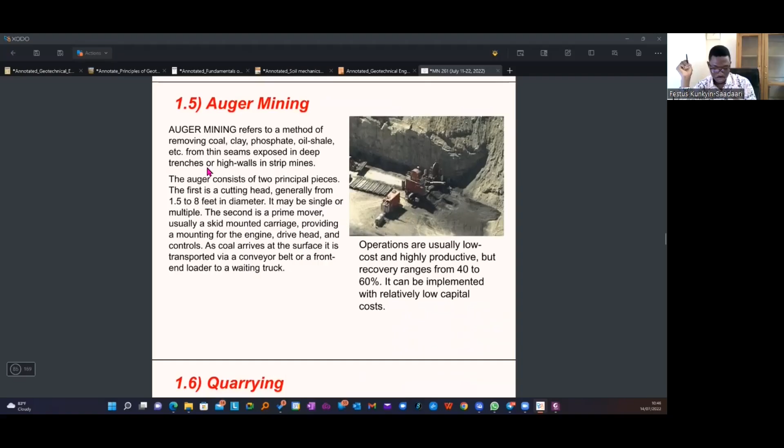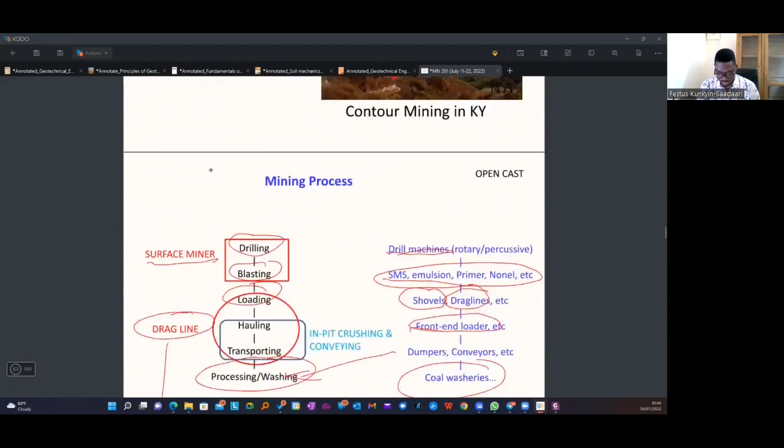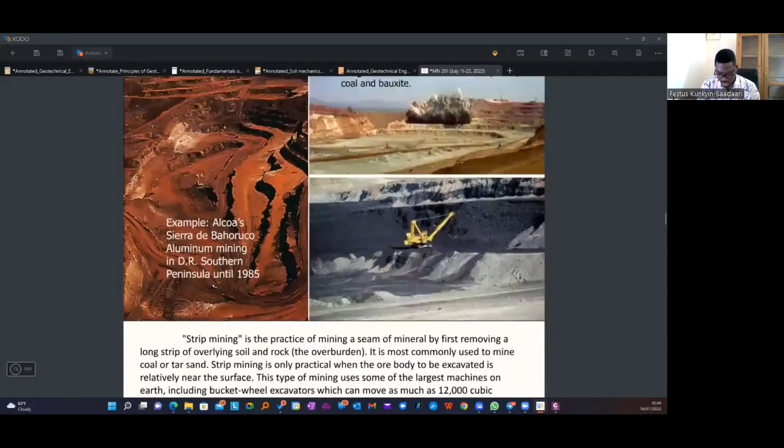Then auger mining. So auger mining is also another form of surface mine where you have already mined out your coal. So let me use an image I had here, which is clearer, to do the demonstration of auger mining for you. Okay, so let's have a look at this. This is image 2, this is what I'm using.

So let's assume that you have finished your mining activities for this particular bench. You are done. But then later on, you realize that there are still some small amount of coal hidden here. It's just like I said, you don't want to let go. So you put your finger there to scoop the excesses that are in those corners. You want to pull them out and enjoy.

So in the same way, when I do my usual strip mining activities, but I realize that there's some kind of overburden here. When I compare the amount of money I will spend in order to take this overburden relative to the deposit below that thick overburden, which is small, I don't want to venture. So I use a technique called auger mining. So I'll come and stand by the edge of the wall and use something that looks like a drill and drill into the side of the wall.

And as I drill, the drill device you are going to use will have a hole in it. So as it pushes into the wall, it will be cutting the coal material through the hole within the drill, and it will be coming out, and you load them onto any device you want to use to convey the material. Then when you drill at this point, you go to the next and drill and pick the material. You go again to the next, to the next, to the next.

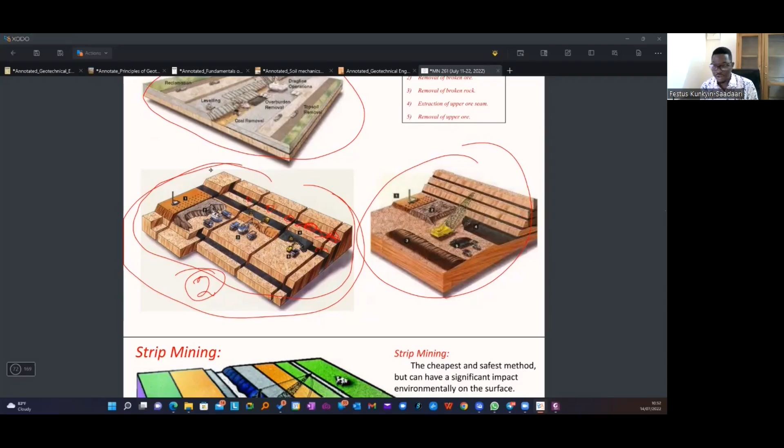But you try as much as possible not to take everything, because if you take everything, the whole of the waste material will cave. So you do it as if you are leaving pillars beneath the overburden material. So at the end of the day, like literature says, with this type of technique, you can get about 60% of the coal you should have left there, because the overburden is too thick and you don't want to spend money. So if you use this technique, you can get about 60% of whatever is down there.

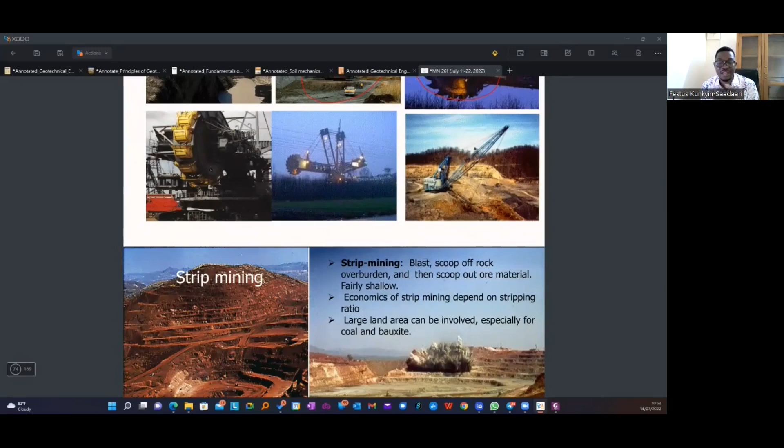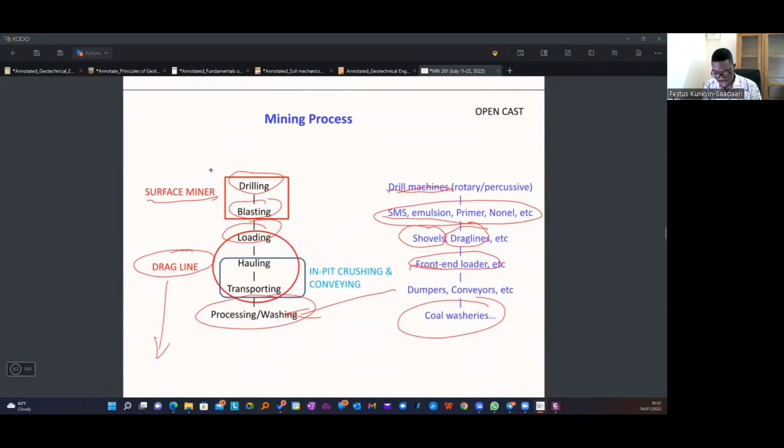So it is not just a full technique that you can use for a whole mining, but it comes in when you have adopted a particular technique for your mining. And this time around, you want to just pick some excesses, which usually in underground mine, we have something we call pillar robbing. So you are finished mining, but you feel your pillars you left there contain ore. So you begin to trim them down from the back towards your exit point. So that is how auger mining also operates.

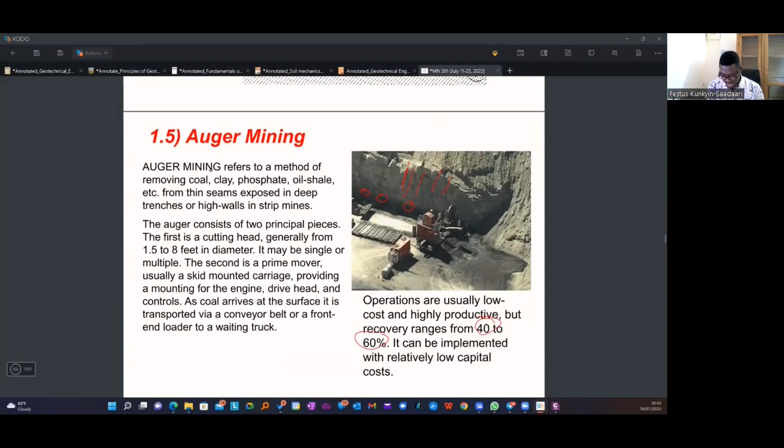So you see, this is the wall. The whole of this wall is waste, but then the coal is hidden below here. So you use this machine and then drill through the wall and get the coal out and let the wall still stand there. So that is it. So you are able to achieve about 40 to 60% maximum recovery when you are using auger mining.

And then quarry is also used when you don't have any precious mineral at a place, but the rock there could serve a purpose. Just like when you go along this Cape Coast Takoradi route, there is a lot of granite there. So many companies are there doing quarry businesses. And so they also drill and blast, just like a normal open pit mine. They do the same processes, but the only difference here is that with a usual precious mineral mining company, when we crush, we proceed to mill and process and get the precious mineral.

But then with quarry, their end product is the rock they have blasted. So they will finish and do the crushing to the sizes that their customer or the client is looking for. Then they are done with their job. So if someone employs them to bring stones of certain dimensions that can be used for ballast on a railway, if I set up a rail and I want to put those stones there, that is what they have requested for. I will break the rocks and crush them to the sizes that are required and sell.

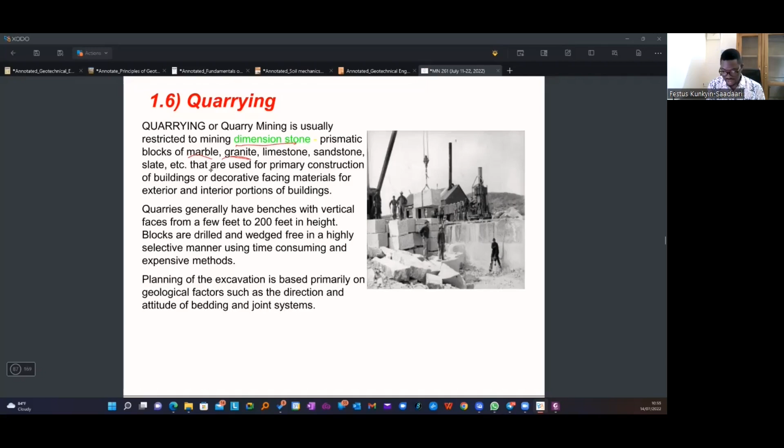And sometimes we also go for dimension stones. If you have a particular type of rock there, you can cut them in the form of shapes that could be used for building. And so we have dimension stones: marble, granite, limestone, sandstone, slate, and the like.

So let's talk about our next technique of mining, which we call placer mining. So I explained earlier that when we say placer mining, it is any mining we do in water. Most of the time, we do this type of mining in water. And then we call it placer because the deposit you are mining in that water was not formed in the water. Rather, the mineral was transported by water from somewhere, and because that water at that point was a low level area, they got deposited.

Just like if you want sand for molding blocks in your house, you could have a gutter or a stream behind your house, then you try to dig a certain portion of the gutter very deep. So when it rains and sand is being transported along with the water, when it gets to that place you have created, the sand gets settled into that hole, and later on you could get into the gutter and fetch your sand for your purpose. In the same way, placer deposits are also like that.

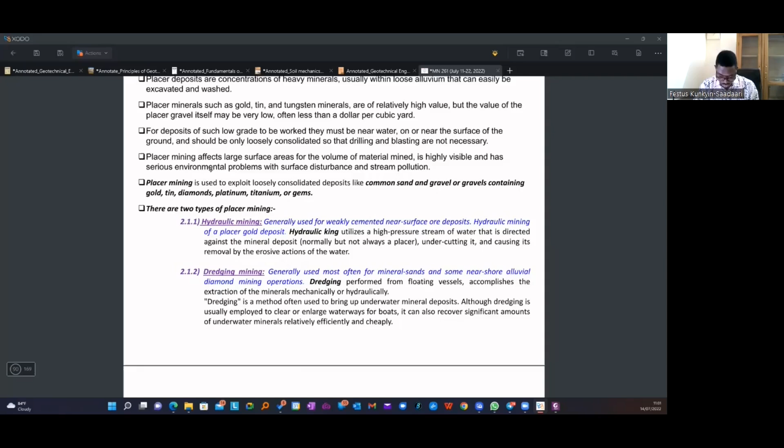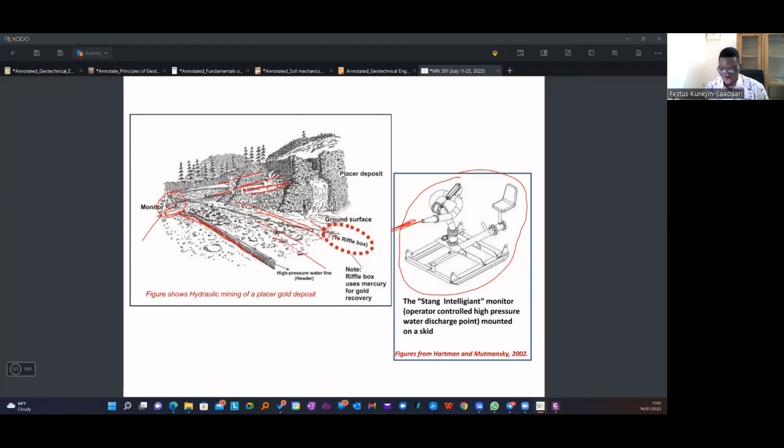So this is providing the water, and then these materials that are broken begin to flow to a certain point. Then after that, they will fetch these materials that are broken, and they will wash or transport them to their processing plant for processing.